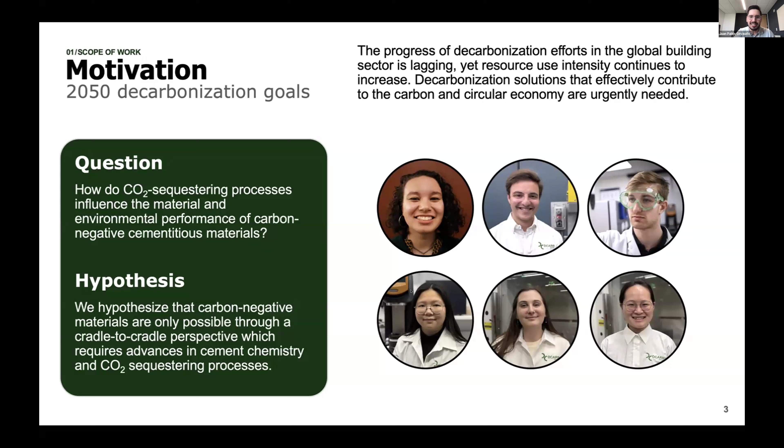So, a lot of words there. We're going to unpack all of these in today's presentation. Let's set the stage a little bit more.

We know that the concrete sector needs to be decarbonized, and in order to do that, we need cost-effective and scalable solutions for CO2 sequestration. When we look at the Global Cement and Concrete Association's decarbonization plans by 2050, we see that CO2 capture and utilization accounts for 36%, making it the biggest contributor to that decarbonization plan.

When we look at the UNEP Global Building Tracker, we see that decarbonization efforts across industries around the world are really lagging behind - out of 100 points, we're actually 40 points behind already. This means that in order to develop scalable, innovative, and effective solutions, we really need to be thinking about how CO2 sequestration can be implemented in the concrete sector.

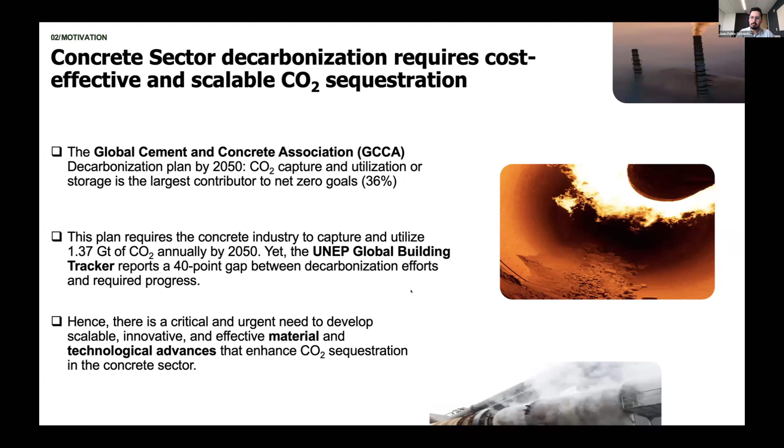Now, in order to do that, I'm going to talk about two main ways that our group is trying to achieve this goal: material innovation and technological innovation. Our research group mainly focuses on these two different thrusts of research.

The first one, material innovation, we're really looking at carbon-negative cementitious materials. Specifically, we're looking at magnesia-based cements and the chemistries behind those cements, which is fascinating because we think, as a research community, this could be the first carbon-negative cementitious material out there. Particularly, we're trying to solve one of the biggest challenges in those cement chemistries, which is the delayed long-term expansion of the magnesia used to create them, which creates important durability challenges.

So we're really interested in advancing our understanding of the magnesia hydration and engineering that hydration process so that we can create these carbon negative materials that will be viable and scalable.

Now, I won't be talking about our research on that material innovation. I want to turn the focus to this technological innovation for the carbon sequestering processing technologies - this is our second research thrust. In this research thrust, our group has developed a new process that uses CO2 to actually improve the performance of cement replacements, fillers, aggregates, while still sequestering CO2.

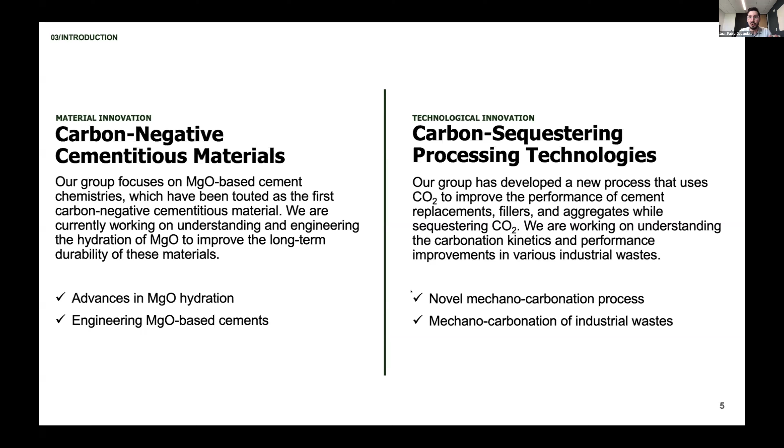Before we go there, I just want to highlight a little bit of the challenges we have right now when thinking about decarbonization in general for any industry source point. We're going to focus a little on concrete, but this applies to other industries as well.

The first thing is the cost of carbon capture and storage is really high, between $150 per ton of CO2 to even above $350. Most of those costs come from capital expenses - the amount of money you need to invest to install the equipment, pipelines, and so forth - as well as operational expenses, which are just operational costs over a whole year.

When you're looking at these costs, they're quite high. For capturing about 100,000 metric tons of CO2 per year in a current technological level carbon capture and storage plant, you'll see those costs are above $70 million, with variable operational cost on top. So the real need behind this challenge is that we need economically viable carbon removal and storage.

Just to add to the complexity and cost of carbon capture and storage, a lot of these plants actually require multi-year assessments of geologies where we plan to store that carbon. We know that cement production happens near limestone deposits, yet near those deposits the cap rock integrity may not be sufficient to accommodate CO2 storage.

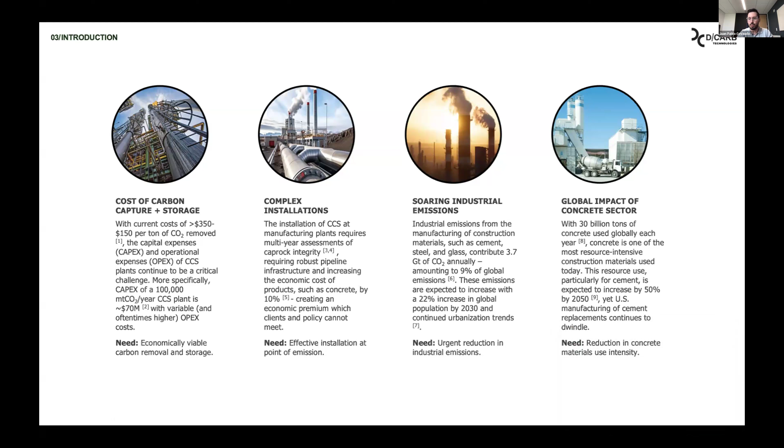Yet when we look at cement replacements, such as fly ash, those have continued to decrease over the past two decades, which creates a real need for reducing the resource use intensity of concrete, or using less cement, which is mainly what it comes down to.

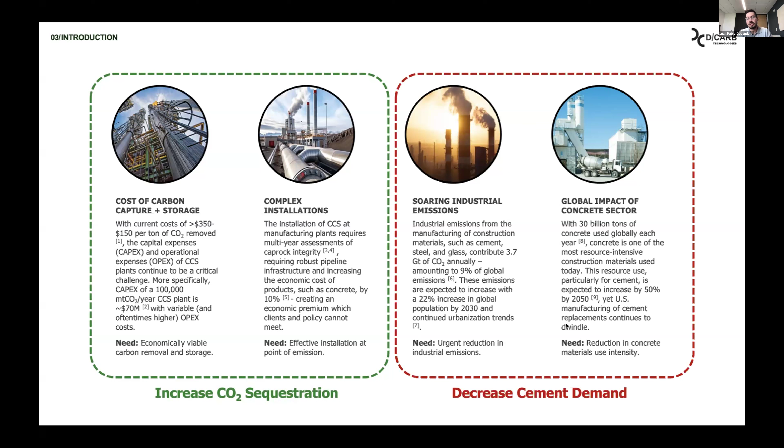So the first two challenges are that we need to increase CO2 sequestration capabilities, while the last two challenges are that we need to decrease cement demand. But how do we do it? Let's focus on the first one.

This is a map of the contiguous US where the light brown areas are where mafic and ultramafic rock deposits are. The green circles are industrial emission point sources, mainly CO2 as well as some other greenhouse gases and emissions. The larger the circle, the larger that point source emission.

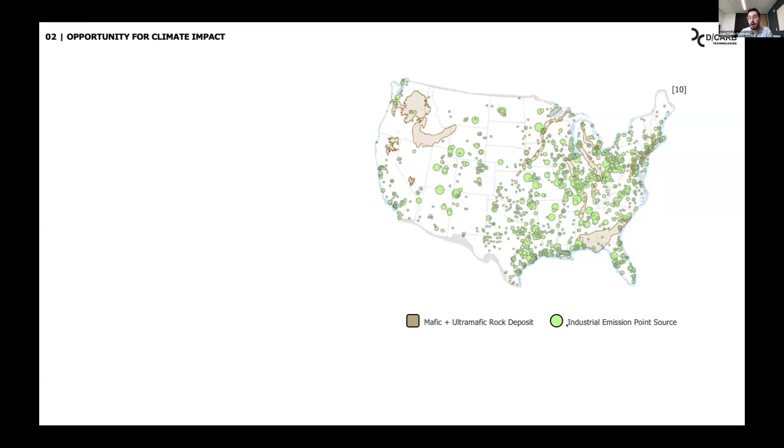Why mafic and ultramafic rocks? Why am I talking about these? Well, they offer a key benefit: they can actually mineralize CO2 with some technological advances that I'll describe later. This means CO2 will turn into a mineral, from a gas into a solid, which is great because then we keep CO2 away from the atmosphere, not contributing to the greenhouse gas effect.

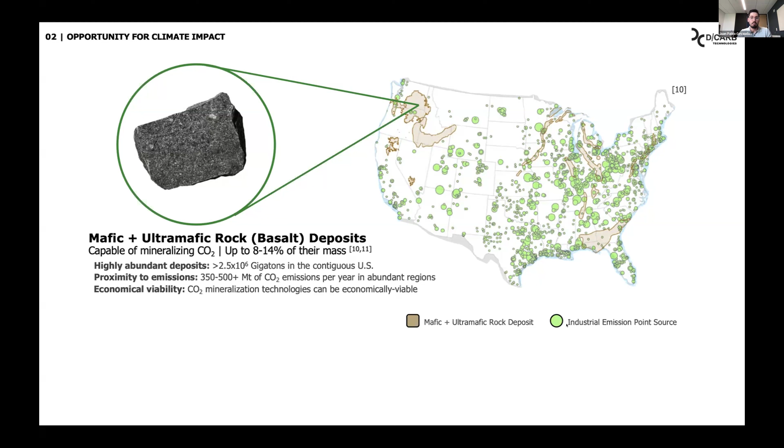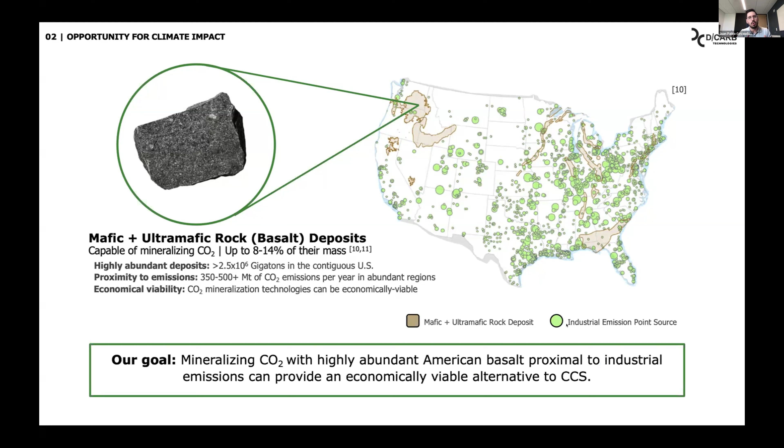Another key thing that's really beneficial about basalt is that it's highly abundant, more than 2.5 million gigatons in the contiguous US. It's near where we're emitting these greenhouse gases, and it can be economically viable. So one of our goals is how can we advance mineralization of CO2 with basalt that is abundant in the US at industrial emissions points, to provide an economical and viable alternative to carbon capture and storage. Now, when we're looking at decreasing cement use, let's look at trap rock.

So it turns out we already are mining basalt, and basalt has an ideal cement chemistry composition, with more than 60 to 70% by weight of silica and alumina, which makes it a really good cement replacement. However, it doesn't react—we'll get to that part later on.

The location is great because it's near metropolitan areas, and if we can turn this basalt into a reactive cement replacement, that will be a great benefit for providing cement replacements to major metropolitan areas in the northeastern US, as I'm picturing here. Now, this is an untapped market.

Right now we import SCMs, particularly in cases where we're importing from Europe or Southeast Asia, and sometimes those prices can reach exorbitant levels. So the goal we have when thinking about reducing the demand for cement is how can we use basalt to not only mineralize CO2 at a national scale, but also manufacture new domestic, abundant, and viable cement replacements.

Now, you may be thinking, wow, that is very ambitious, that is kind of crazy. But our technologies are actually able to do that, and have actually been shown to do that.

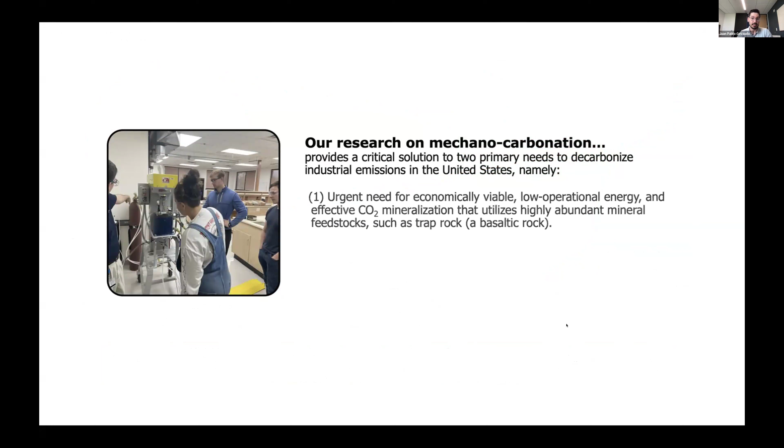Our innovation is called mechanocarbonation, and it is a critical solution because it allows us to decarbonize industrial emissions in the US by doing two things. The first is an economically viable, low operational energy and effective CO2 mineralization process that uses basalt, trap rock. The second is that we are able to manufacture a domestic cement replacement for Portland cement, as well as some other applications that we're investigating, which I will not discuss in today's presentation.

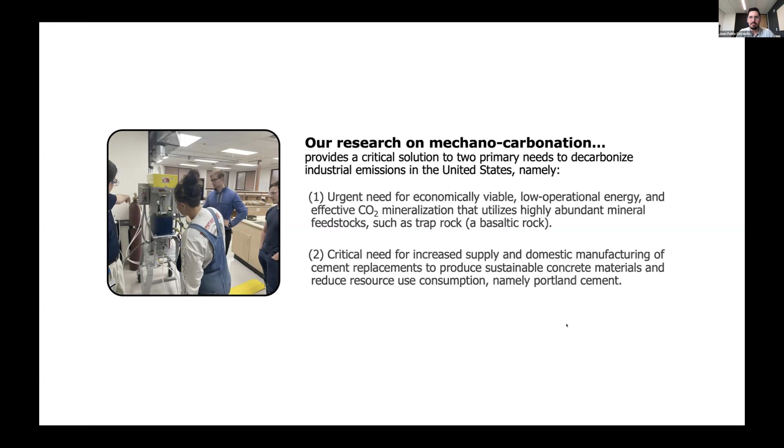So you're thinking, this sounds great, but how does it work? What are we actually doing? Let me show you. In this picture, our senior R&D engineer, Dr. Anand Swathinathan, is pointing to a gas cylinder in the back, which we have retrofitted. This is our first version of this technology. We're in generation 2 at the moment, so it doesn't look quite like this.

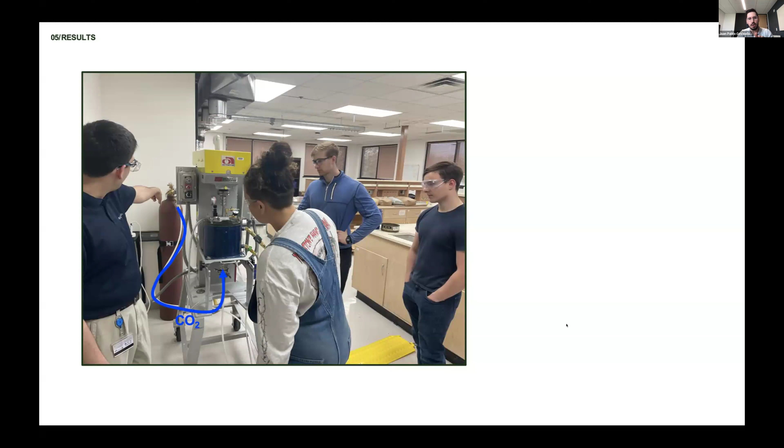We're able to pump CO2 from the bottom of our stir media tank. What is happening inside that blue tank is that we have a stirred media reactor, which allows us to mill the basalt rock while we are injecting CO2, mixing liquid, gas, and solid phase together to not only carbonate the calcium and magnesium in basalt, but also break apart the crystal structure so that it can create a cement replacement.

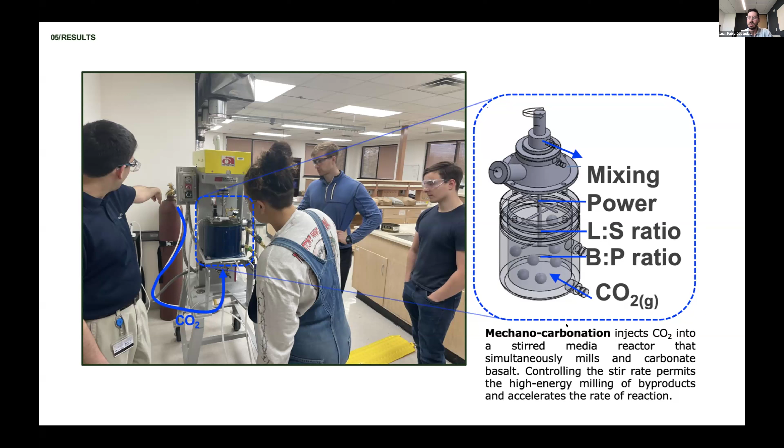Here I'm listing a couple of variables that are very important in this process, such as our mixing power, the liquid-solid ratio, and ball-to-powder ratio of the reactor. I'm going to show you how changing these variables changes or affects the performance of not only our CO2 mineralization efficiency, but also the reactivity of that cement replacement.

So you're thinking, this sounds great, but what has been done so far? And that's a great question. So far in conventional aqueous carbonation, you're thinking of using an industrial byproduct, hopefully something that is a bit alkaline.

Upon some milling, maybe high energy milling, you mechanoactivate that industrial byproduct. Then you would take that powder material and put it in a pressurized condition with CO2 to mineralize that CO2 gas into a solid mineral. You get this carbonated waste, which has been tested as a cement replacement and other applications, and it works. However, the milling and the pressurized aqueous carbonation are very energy intensive processes, which oftentimes negate the environmental benefits of this process.

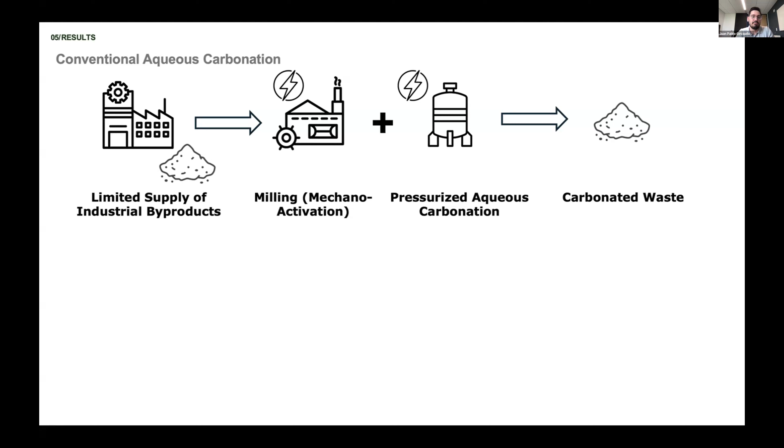The other thing I mentioned is that it's a limited supply of industrial byproducts. We don't have a lot of them, but that's another question, and we can talk more about that later.

Now, in our novel mechanocarbonation process, we're using abundant basaltic rocks, and that is a key part of this innovation. The other part is that we actually combine the mechanoactivation and aqueous carbonation into one single process that is more simple and doesn't utilize high pressures, and we can control how much energy we're inputting into that reactor. Therefore, we are maximizing the environmental impact or benefits for this particular technology.

Now, the carbonated cement replacement or the carbonated product can be used for cement replacements and support sustainable concrete production, which in the US, we rely on using cement replacements to create low carbon concrete. So it's the main strategy that we have.

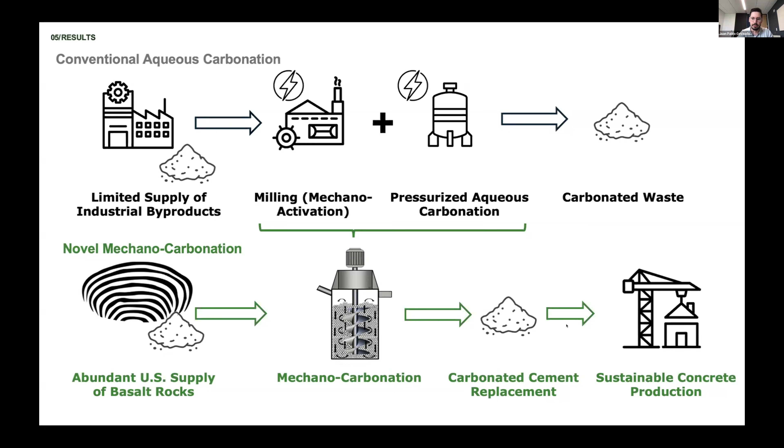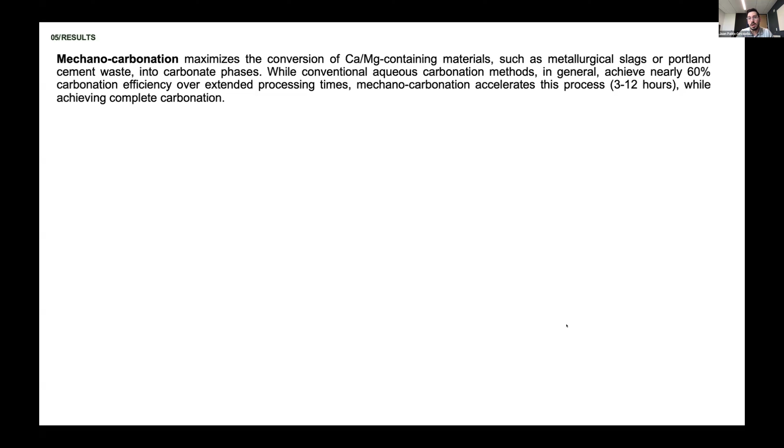So what I want to show you is how mechanocarbonation compares to other conventional aqueous carbonation methods. In general, other aqueous carbonation, or just looking at the service life of concrete that also absorbs CO2 and sequesters it in a mineral carbonation process as well.

What happens in this process is that, well, service life only achieves less than 25% by weight of the potential for concrete to absorb CO2 from the atmosphere, and that is due to some diffusion limitations. Yet also wet milling and wet aqueous carbonation have limitations as well, mainly diffusive barriers that form in these processes and only achieve less than 60%, in some cases a little bit higher, but they're really limited by these diffusion barriers as well.

In mechanocarbonation, because we are milling, we can actually exfoliate these diffusive barriers, which turns out to be a lot of silica gels, and actually achieve up to 100% carbonation efficiency in just about 3 to 12 hours. So we are accelerating the process much, much higher than other technologies here.

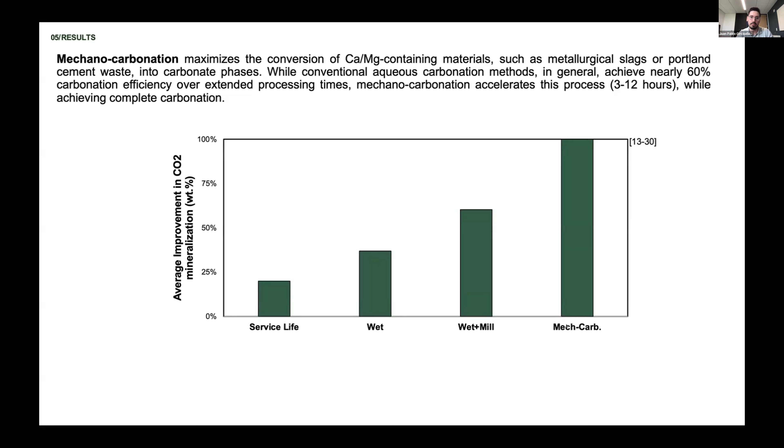Now, the research question that we're going to be exploring in this presentation is, what is the SCM performance and carbonation efficiency of doing mechanocarbonation on basaltic rocks? This is the first study that has looked into this particular application. And here I'm excited to show you our first results.

Now, these are hot off the press results. We are tying the knots in a few of these analyses and collecting the last bit of data to finalize these results, and we hope to be publishing them in the next couple of months. So be on the lookout for our first publication on the mechanocarbonation of basalt.

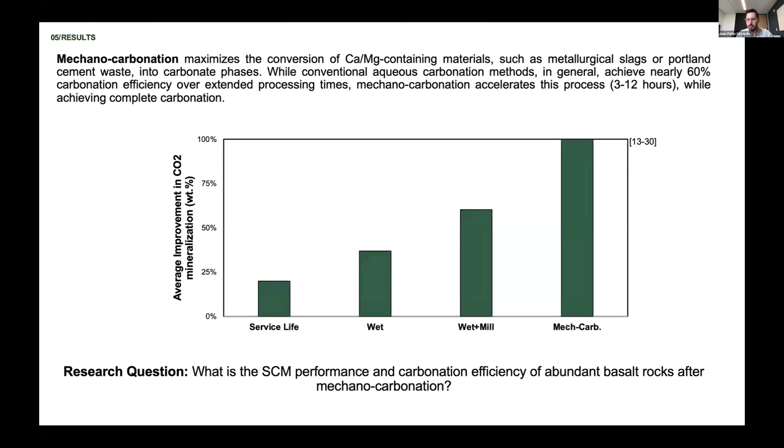One thing that I forgot to say, a lot of the mechanocarbonation work so far has been done on metallurgical slags or Portland cement waste, which are alkaline materials and have that benefit to increase the efficiency of mineral carbonation. So I won't be going into details on that, but if you have questions, just let me know and I can definitely talk more about that.

So just to give you an idea of the experimental setup: the first thing is we are exploring 4 different conditions, 4 different experiments, where we are mechanocarbonating this basalt. The chemical composition of the basalt is shown in table 1. What you can see is that we have 5.7, almost 5.8 weight percent of magnesium and about 9% by weight of calcium. Those are the 2 main components that we're trying to carbonate, that we're trying to use to convert CO2 gas into a mineral.

Now we're going to test the 4 conditions where we're varying 2 different variables in this mechanocarbonation process. The first one is the milling energy, in revolutions per minute or RPM. We have 2 conditions there: 250 RPM, which turns out to be a low milling energy, and our higher milling energy at 500 revolutions per minute. We're also varying how much ball media for grinding we have in comparison to the basalt powder, so we have 2 different ball-to-powder ratios, 10 and 40. Testing for mechanocarbonation in this particular study only lasted 3 hours, so all the results we're going to show you are for 3 hours of mechanocarbonation.

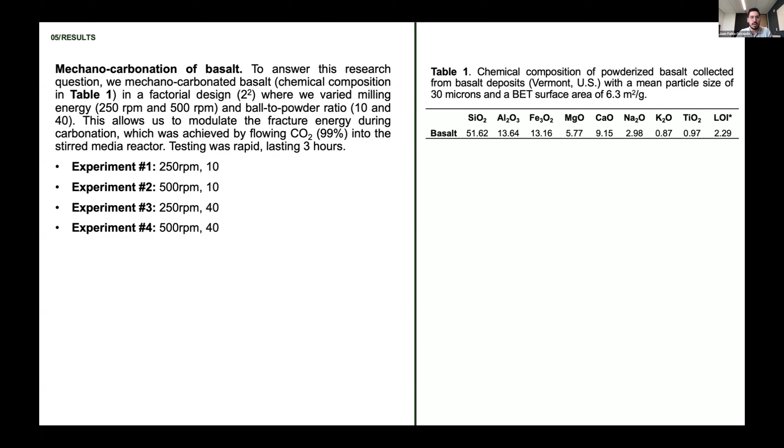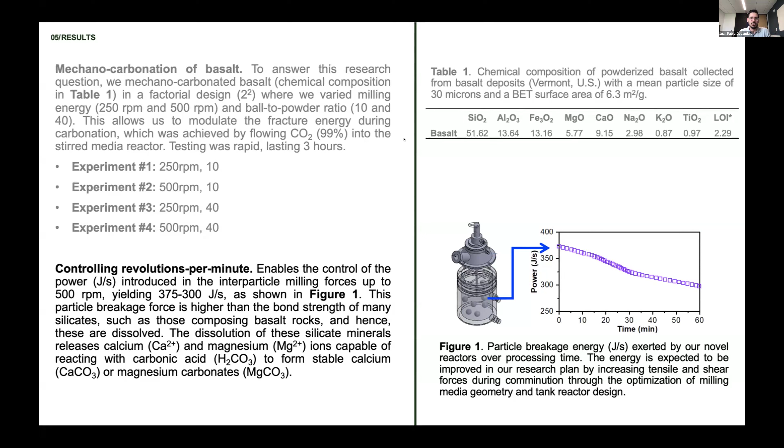Now, the first result that I want to show you is how the power is actually changing in the first hour of mechanocarbonation. What you can see here is that the power in joules per second is actually decreasing as we progress during this mechanocarbonation. The reason I wanted to show you this first is that it's a really important key takeaway of the technology: as we mill, we're actually breaking apart the basaltic rock and fluidizing our reactor so that it consumes less power over time. This is really important when we're thinking about life cycle analysis and technical economic analysis, to make sure that this technology has the maximum benefit to decarbonizing the concrete sector.

Now, the key reaction that we're relying on is this particular reaction where we have calcium oxide or magnesium oxide reacting with carbonic acid to create either calcium carbonate or magnesium carbonate. These are the mineral carbonates that are being formed to lock away our CO2.

And this is actually really beneficial for us because that's what we wanted to do. We want mechanocarbonation to dissolve these silicate minerals such that they liberate calcium and magnesium ions that are capable of reacting with carbonic acid and then creating that carbonate phase, hence mineralizing the CO2. So that's great. But what that also does is that as these silicates dissolve, the silica that is dissolving is going to go through a polymerization and gelation process, which really just means that the silica is going to agglomerate and create a gel that we hypothesize, and show, can be passivating.

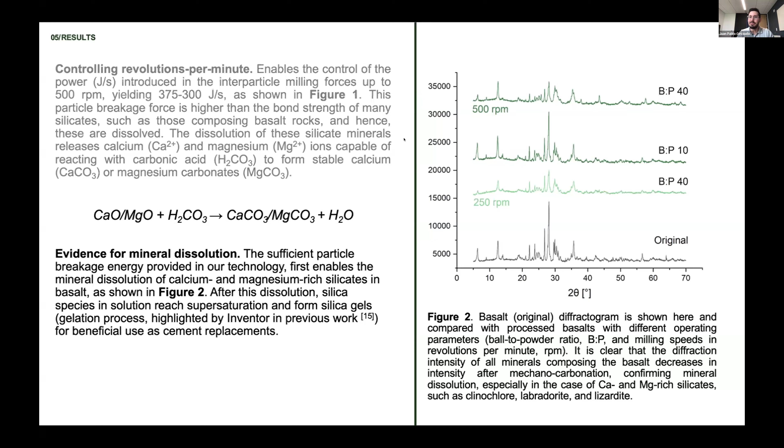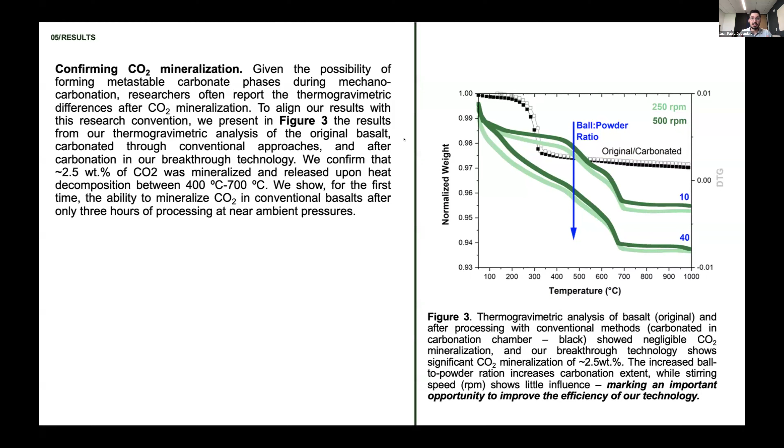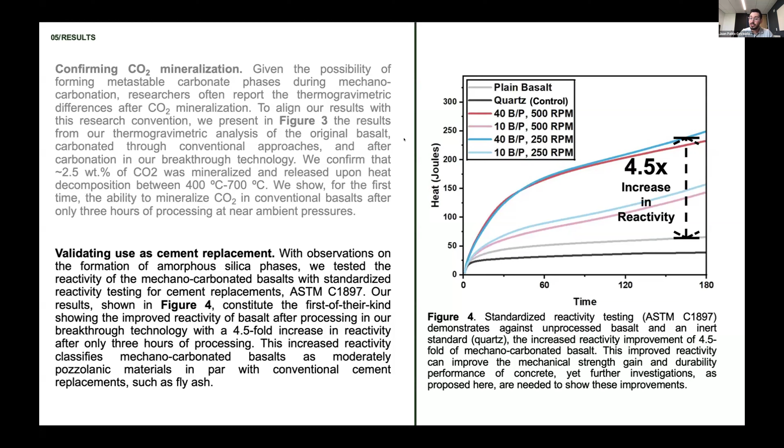But in order to do that, we really need to start looking at the microstructure and understanding the mechanisms. This is where we've been spending a lot of time in the lab, looking at how these mechanisms differ as we change a lot of these variables.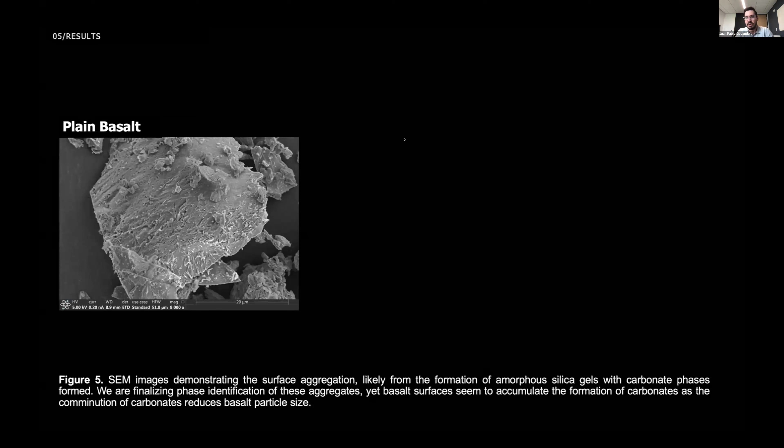Here is an SEM picture of just basalt, a plain basalt particle. When we do mechano-carbonation on basalt at a 10 ball to powder ratio and increase the milling energy, you can see that the surfaces are quite disrupted. Interestingly, we have aggregation of smaller particles or clusters around the surface of this basalt.

We have really interesting hypotheses for why this is happening. We have indications to believe this is actually amorphous silica gel clustered with carbonates, and that's why we not only see the carbonates in the TGA, but also that increased reactivity in the SCM.

Now, when we look at the 40 ball to powder ratio, this is our highest reactivity SCM that we can produce from basalt. We see that not only are we decreasing the particle size of basalt, but we still have those clusters forming with large disruptions to the surface morphology of the particle.

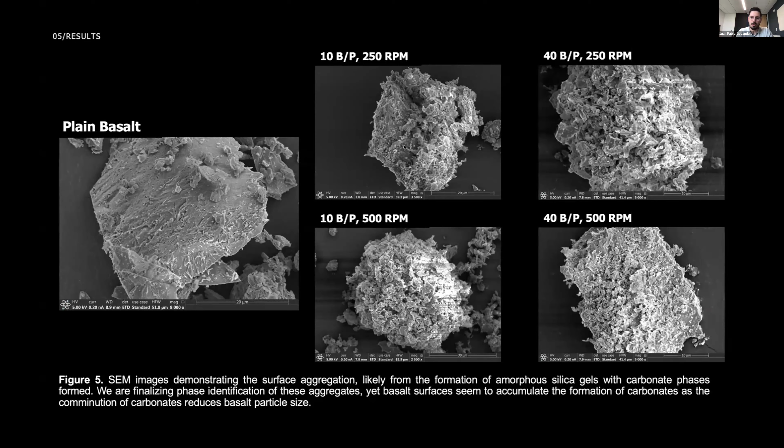Because we were really interested in this cluster formation, we wanted to run particle size analysis of the mechanocarbonated basalt. For 40 ball to powder ratio, we see that we have really large agglomerates forming near 1,000 microns.

This is fascinating because a big concern in the cement and concrete field is that milling will increase water demand for these cement replacements. So one key thing is controlling the amount of surface area generated through milling, and this agglomeration and clustering may be beneficial for controlling that water demand. We're looking at these investigations further to really tease out how workability and water demand can be affected.

Interestingly enough, when we're looking at that 10:1 ball to powder ratio, in both cases of 500 RPM or 250 RPM, we see that agglomeration still occurs, but the agglomerates are not as big as when we have that high ball to powder ratio.

Another key consideration I meant to highlight in previous results is that milling energy, how fast we're spinning our rotor in that reactor, signified by revolutions per minute, 500 or 250 RPM, really shows that there is no real difference in either the reactivity or the carbonation. This is exciting for us because it shows we could potentially use lower speeds in milling our materials but still achieve carbonation and SCM reactivity metrics or goals. That's exciting because we can lower the operational energy needed to manufacture these SCMs. More results on that, hopefully in the next couple of months to share with all of you.

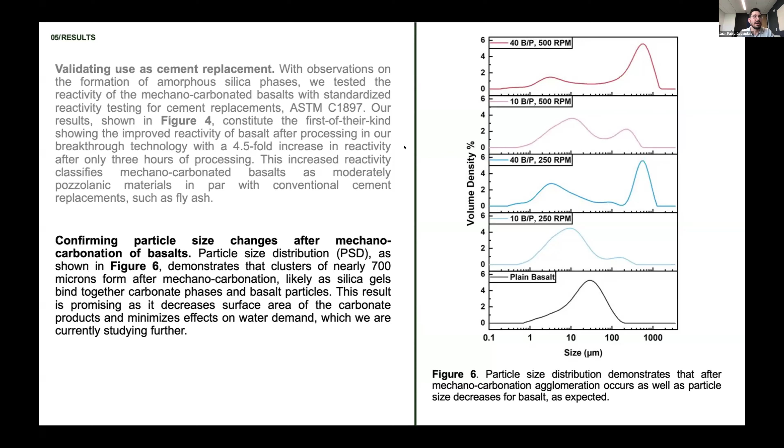I wanted to conclude with some of our key observations. We started out with the key question of what is the SCM performance and carbonation efficiency of these abundant basalt rocks after mechano-carbonation. Our hypothesis was that we needed to increase both ball to powder ratios and milling energy, basically hit it with everything we have to achieve these two metrics.

What we found is that milling energy doesn't really matter as much. It doesn't have such a significant influence on our results. And yes, we can actually carbonate these basalts, achieving 2.5 weight% CO2 uptake and more than a fourfold increase in reactivity, making these mechanocarbonated basalt materials a good option for cement replacement.

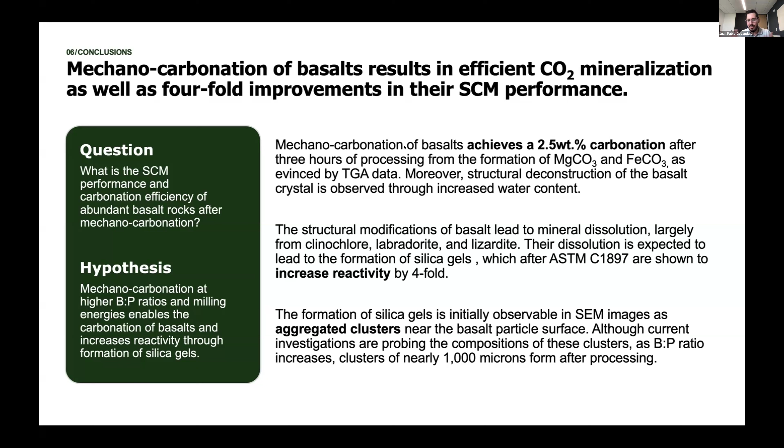Very interestingly, these aggregated clusters from SEM images show that these clusters could have a really important role in the mechanisms by which this mechano-carbonation is happening, and that the formation of silica and carbonates is interlinked. We're exploring that mechanism more in our current investigations, but we hope to publish these in the next couple of months to share and really understand the mechanism so we can engineer this process for improved efficiency and large scale deployment here in the US.

All right, so with that, I think we can open it up for questions.

Thank you so much, JP, it was a great talk.